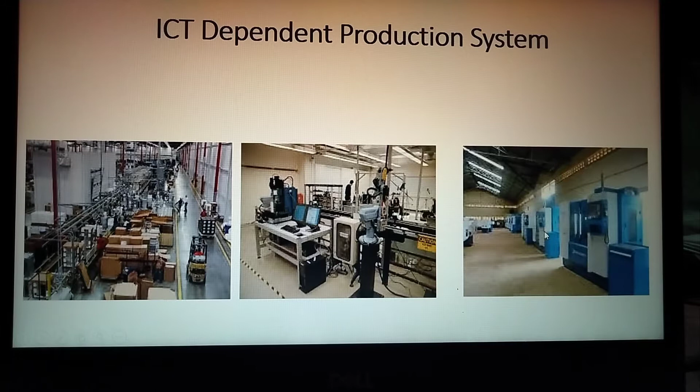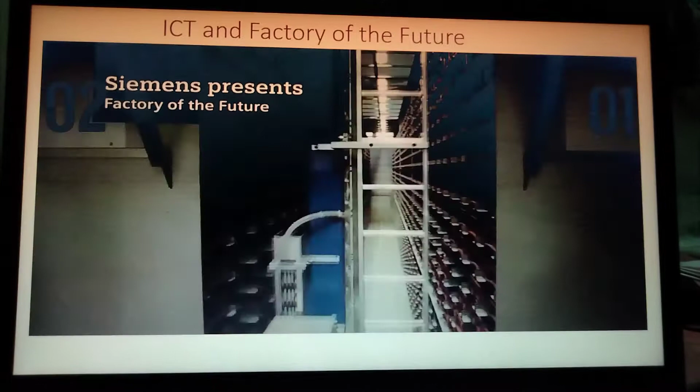In this video, we're going to show you how big, bold technology leaps are enabling sustained productivity gains in UK engineering, manufacturing and distribution, and how you can join in.

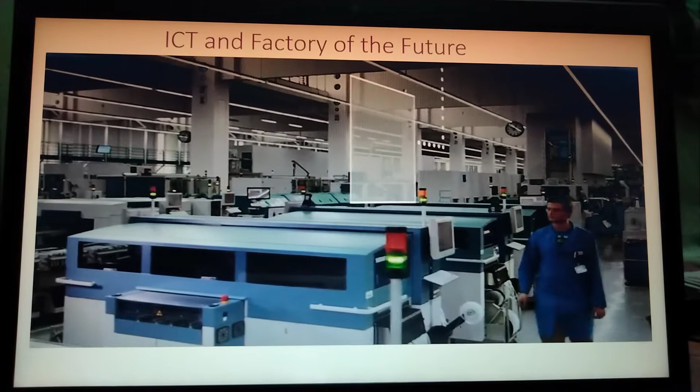Right now, in Europe, raw materials, parts and components are making their way independently through the production process, with machines, products and sensors spontaneously communicating with one another, making decisions without direct human intervention.

The Advanced Manufacturing Research Centre is backing that vision of the future by building a brand new £40 million factory in Sheffield.

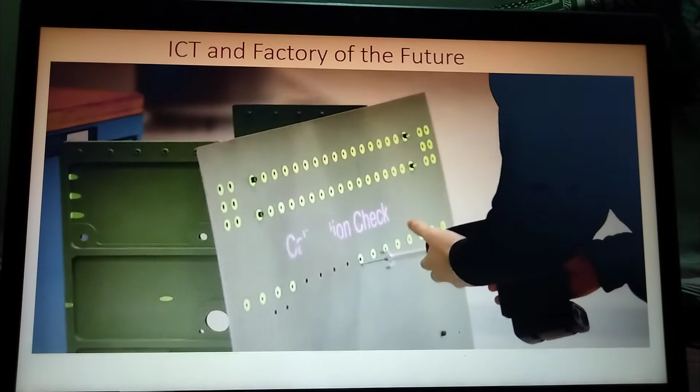So we're bringing together industry experts, academics, backed by government to really focus on innovative products for reconfigurable manufacturing. We're here to develop the understanding, adoption and deployment of them throughout UK industry.

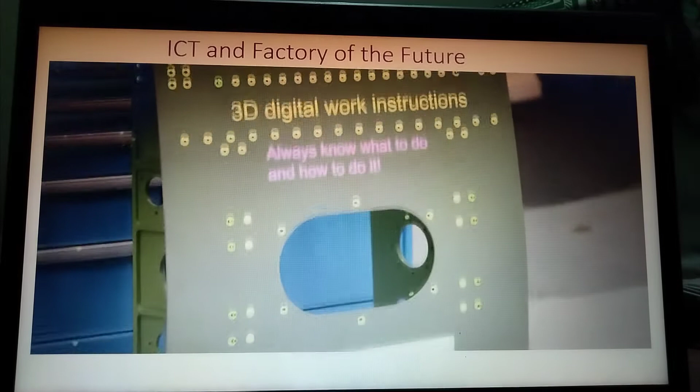We're looking at augmented reality, taking information from the CAD system and displaying it on parts like a wing. And 3D printing is changing the world in terms of the ability to prototype much quicker than we've been able to in the past.

That sounds great, but how can businesses get involved? We work with businesses from large OEMs to tier ones and SMEs, so really we take inquiries from absolutely anybody.

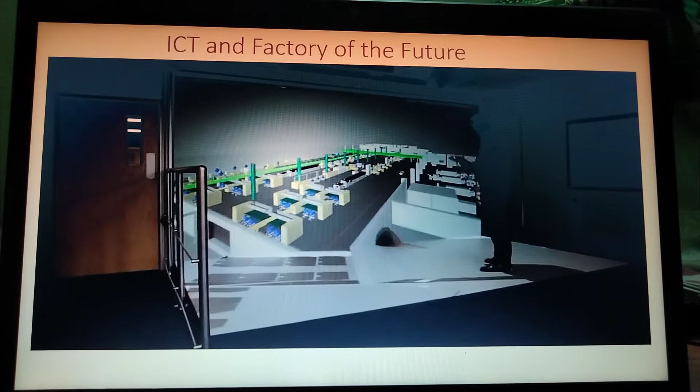One of the new technologies that's captured everyone's attention is virtualisation. The idea is a simple one. You take the miles of conveyor belts, motor drives, scanners, elevators and machine tool components and raw materials, and then...

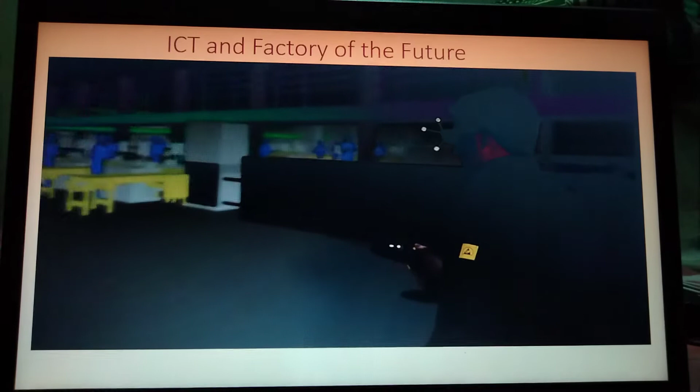you put all that information into a software package and create a virtual factory, an exact replica in fact of the real physical factory, because the virtual factory enables you to take a real-time big picture view, identify areas where you can improve efficiency, cut out waste and prevent problems occurring in the real factory.

But the biggest thing virtualisation delivers is the ability to add more innovation, more flexibility and most importantly more productivity.

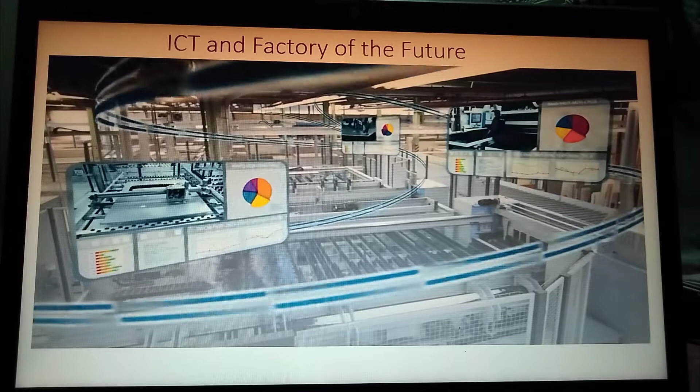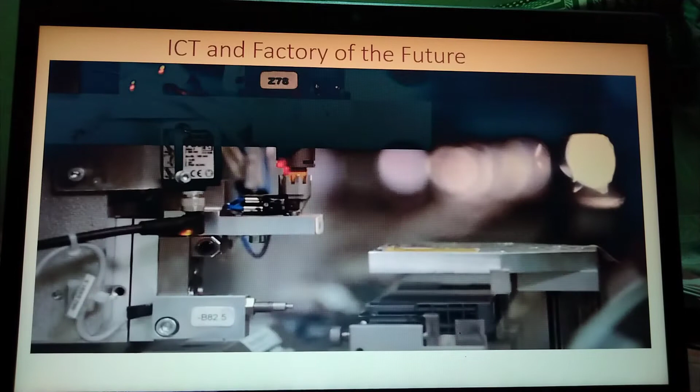Today every sensor, button and monitoring device has the potential to become a participant in the Internet of Things, each with their own IP address. These so-called cyber physical systems will eventually enable machines and workpieces to communicate with one another and make decisions within the process.

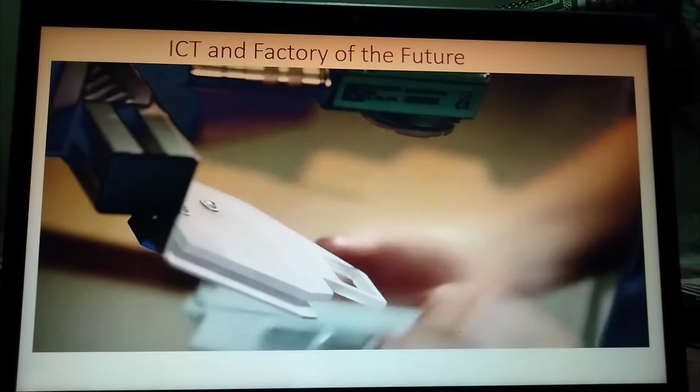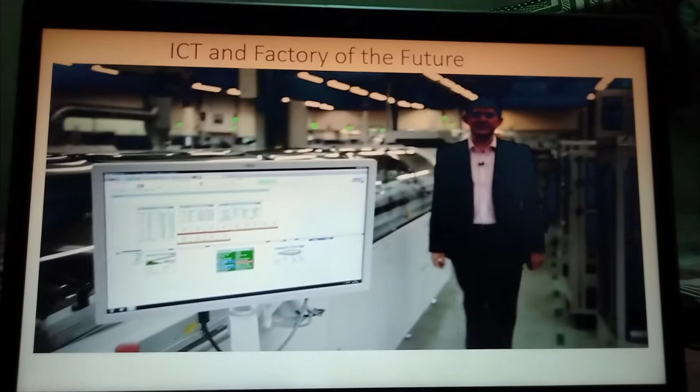Employees can use virtualisation to check the product meets the required quality standard and is ready to be shipped to the customer. Today, your IT infrastructure is becoming more important than your raw materials, machine tools and physical assets.

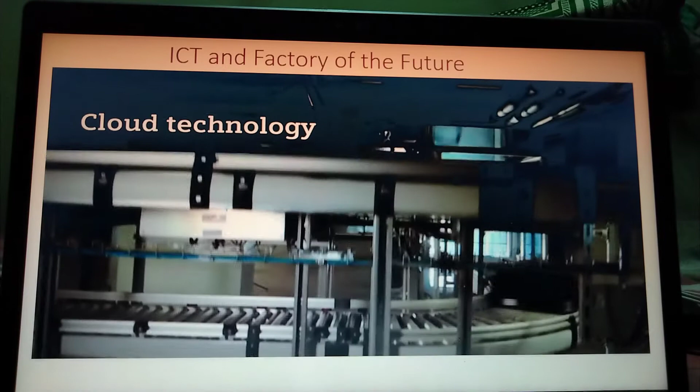Cloud technology is enabling infrastructures like this to become part of a global ecosystem of suppliers, partners and customers, a connected supply chain speeding up decision making, collaboration and innovation.

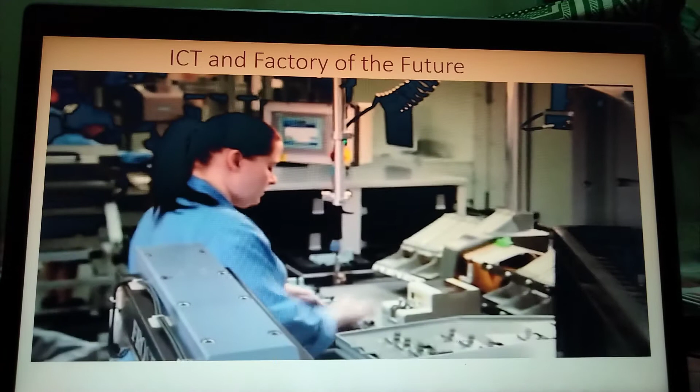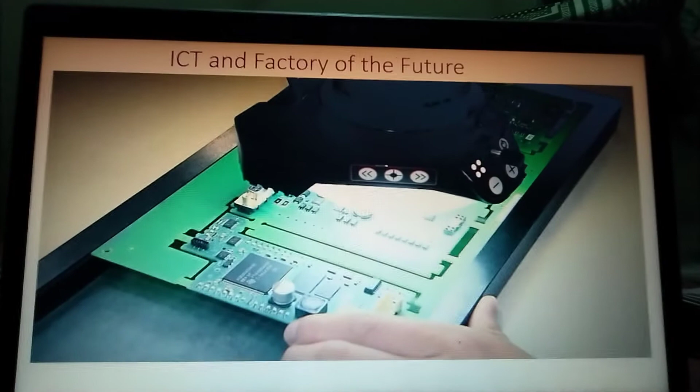The companies who thrive in this new world may not be the biggest right now, but they certainly will be the most flexible in the future, with the ability to customise the product to meet the ever-changing demands of their customers.

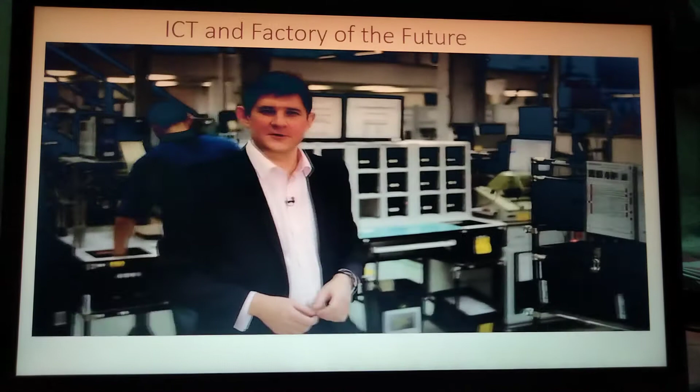Customisation is great because it requires zero inventory, everything is made to order and there is no waste. The step beyond customising is individualising. An entire product is made just for one customer.

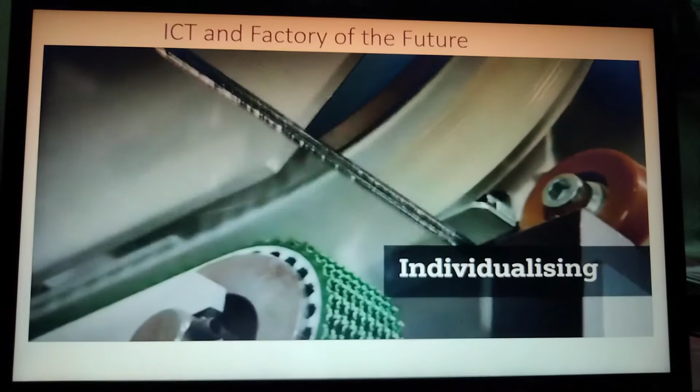Like most of today's early adopters, we too started by creating a virtual 3D factory using an easy-to-use software package, and this allowed us to experiment with different setups.

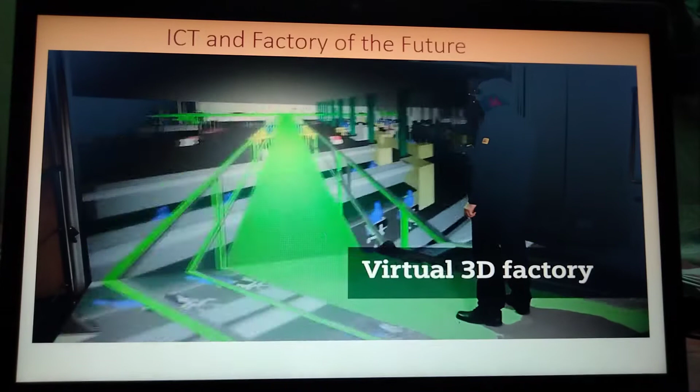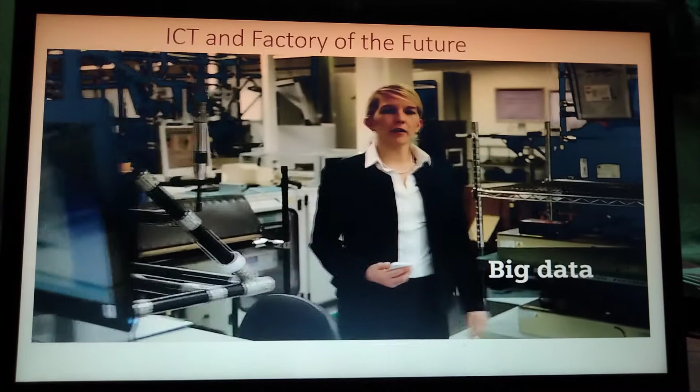But there are problems when you start harnessing the Internet of Things and deploying cyber-physical systems, you generate mountains of big data. Fortunately, smart systems are now available which make sense of that big data, delivering the factory decision makers the information they need.

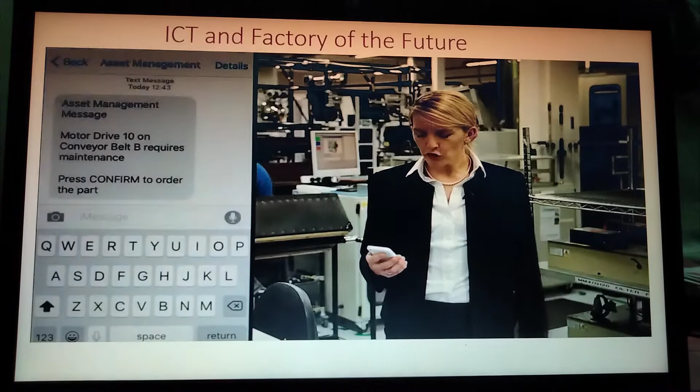A typical text message might read, "Motor drive 10 on conveyor belt B requires maintenance. Please press confirm to order the parts."

Creating your UK factory of the future is going to require skills. People, engineers, technicians. But what skills are going to be needed? Where are these people going to come from? And who's going to train them? To answer that question, I travelled...